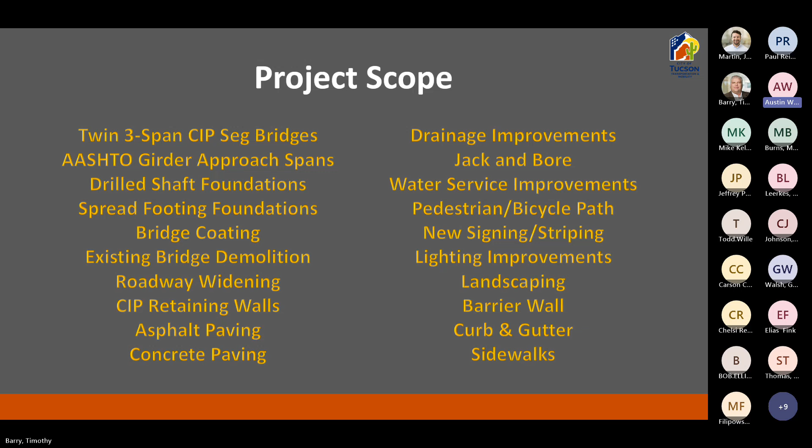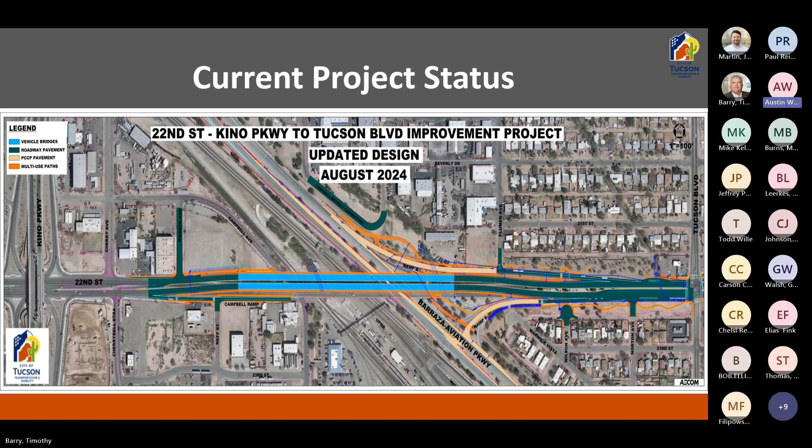So we want to talk about the current status of the project. I mentioned this rendering is also sitting over there for you to look at. That's the overall project with the updated design—the most current, up-to-date design of the project as it stands right now.

So the biggest change, and where we're at now, is project delivery. This is now going to be a pure design bid build project. The CMAR is no longer going to be this project delivery method.

We are at 100% plans right now. They are not the final signed and sealed version, so we cannot share the plans with you as of yet. So we're not going to have the final plans available for the group today. Once they are the final PS&E package, they'll be available, but we're just not there yet.

The project funding is finalized. That was a big hurdle with this project. We'll talk more about that in depth later on. We've also very recently received the categorical exclusion for the project, another big hurdle we've recently obtained. We are currently preparing the bid documents, as I mentioned in the schedule earlier, and we have an anticipated construction duration of between 30 and 36 months. We'll get a little more detail on that, but that's the current anticipated project schedule.

So again, what has changed? Quite a bit has changed with the scope of this project since 2021 when it was advertised as a CMAR project. Number one, we have obtained federal funding. There was no federal funding early on, but there is now. The project has received a RAISE grant, and there's also some STBG funds that have been obtained. So that means there will be FHWA federal highway oversight, Davis-Bacon wage rates, Build America Buy America requirements, EEO and DBE requirements. That's a pretty significant change from the original scope.

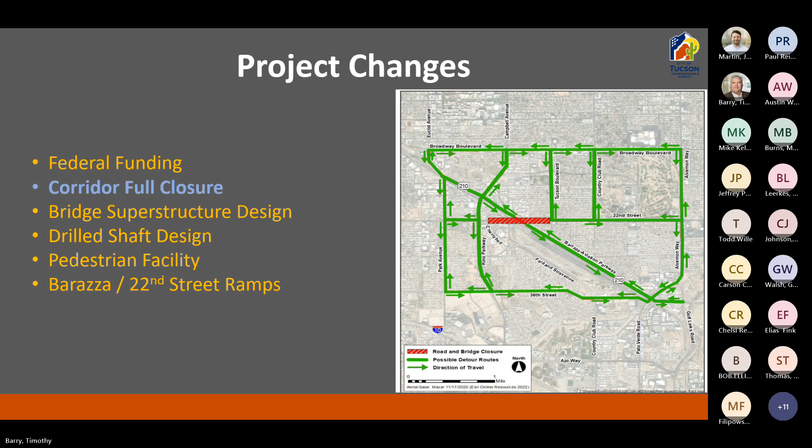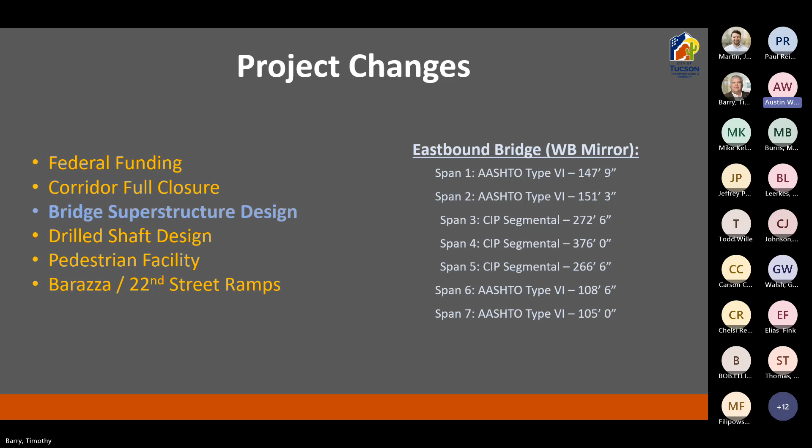Another significant change from 2021 is the superstructure design layout. Originally it was a 5-span cast-in-place segmental design. We now have 3 spans of cast-in-place segmental, per bridge, since they are twin bridges. So we have the span layouts, which I'll walk through briefly.

So this is one of the bridges. Just walking through the span layouts. This project has 2 approach spans of AASHTO on either side of the structure.

On the eastbound, you're going to have 147 feet 9 inches, and then it lines up to the abutments. It'll be shorter on the westbound, at 105 feet. Then the second span is going to be 151 feet 3 inches on the eastbound, and 108 feet on the westbound.

Moving on, span 3 of the segmental will be 272 feet 6 inches. The primary and main span over the railroad tracks, the majority of it, is actually 376 feet, span 4. Moving to span 5, which goes over Barraza Aviation, SR 210, it's going to be 266 feet 6 inches.

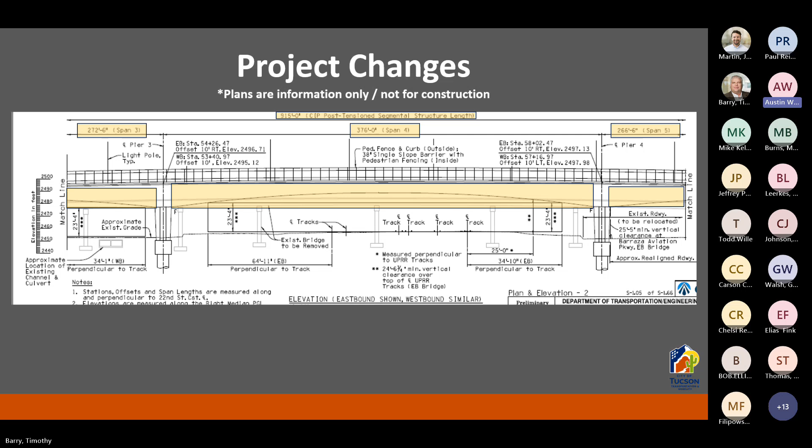Then we get to the final 2 spans of the eastbound and westbound, spans 6 and 7. You'll notice the span lengths flip-flop for the east and westbound bridges to align at the abutments. So the eastbound span 6 is 108 feet 6 inches, and eastbound span 7 is 108... then 105 feet for span 7. For the westbound bridge, span 6 will be 151 feet 3 inches, and westbound span 7 will be 147 feet 9 inches.

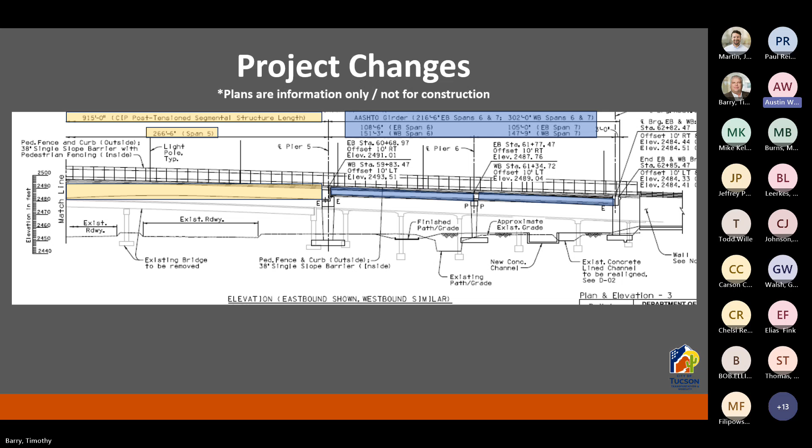Another pretty significant change from 2021 is the drill shaft design. I'll reiterate that what's shown here is not the final design. These are just approximate anticipated lengths, not the final lengths for the project.

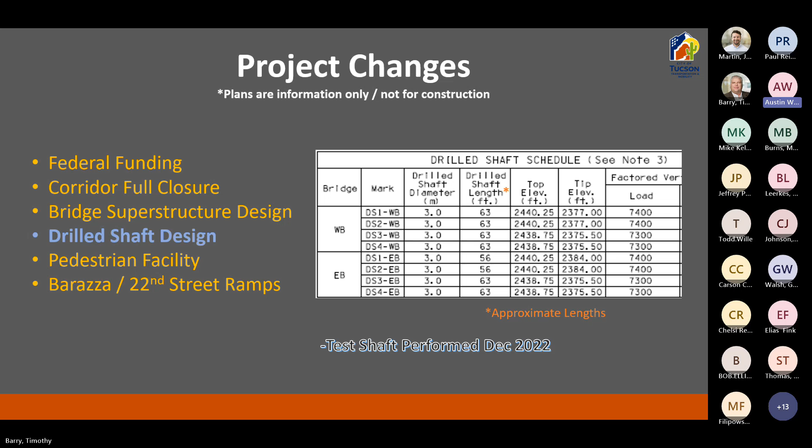There will be 8 drill shafts total on the project. You can see the approximate lengths, but we significantly reduced the overall number of shafts for the project, and also reduced their lengths. The final details will be in the final plans. We also want to note that a test shaft was performed in December of 2022, which has helped dial in these shaft lengths and the drill shaft design as well.

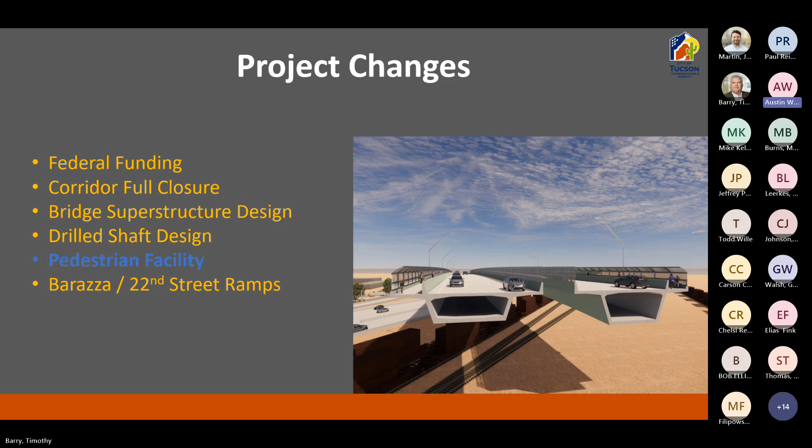Very significant change - if anybody looked at the plans from the original design back in 2021, the pedestrian facility has changed pretty dramatically. In the first design, there was a separate pedestrian bridge that hung in between the twin segmental structures. That has been gotten rid of, and now the pedestrian facilities will be on the outsides of the bridges, with 8-foot pedestrian, bicycle pathways on each structure. So that center pedestrian bridge is now gone. Now you can see a cross section from the plans where the new pedestrian facilities are located for the project.

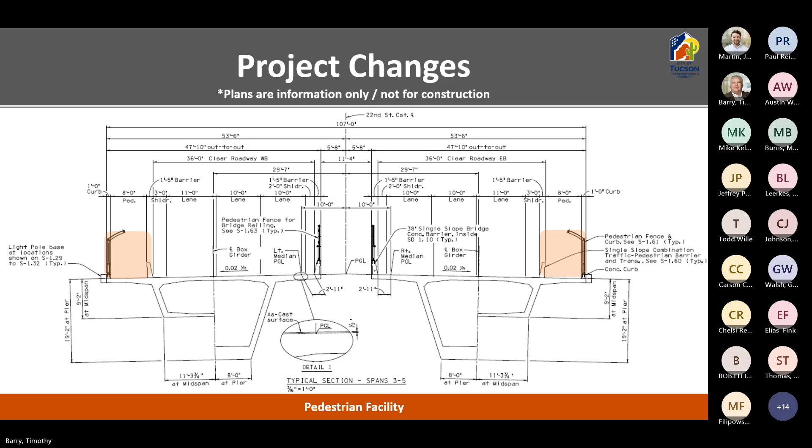Finally, some minor change with the ramp access between Barraza Aviation and 22nd Street. The most significant change is ramp B. The current configuration has 2 separate accesses: a dedicated free-flowing right to get on that ramp, and the current left turn ramp off of Barraza Aviation. Those will both be eliminated and combined into one single ramp. So from Barraza onto eastbound 22nd, there'll be one single ramp we're calling ramp B, and ramp A essentially remains the same. With this addition of ramp B, another change is Wilson Ave will become a cul-de-sac, so Wilson Ave will no longer access 22nd Street directly. So minor change there with ramp B as part of the new scope.

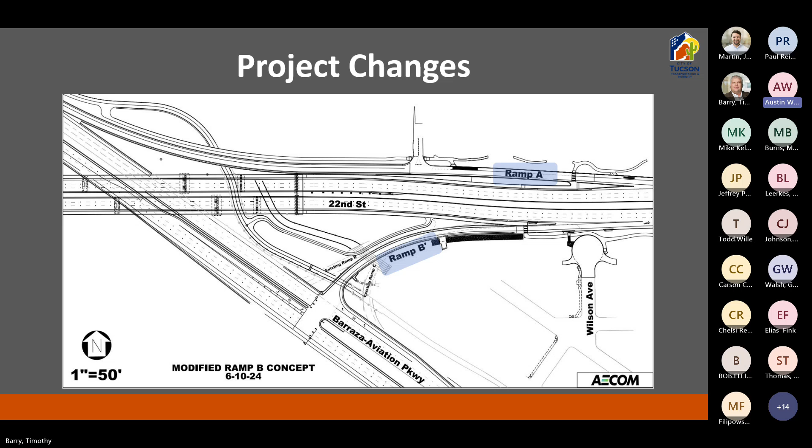Here's a rendering of that. We'll see more in-depth renderings here in a little bit.

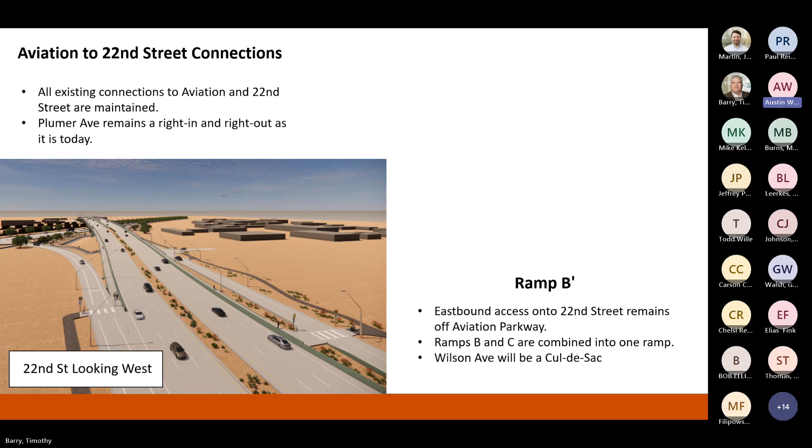So some general information for the bidders. In the contract documents, there's going to be some requirements for the segmental construction, including requirements on personnel for the construction manager, project manager, structures superintendent, and the structures second supervisor to have some level of experience with segmental bridge construction. Again, I point out these are draft specifications, not the final project specs, but those will be in the contract documents.

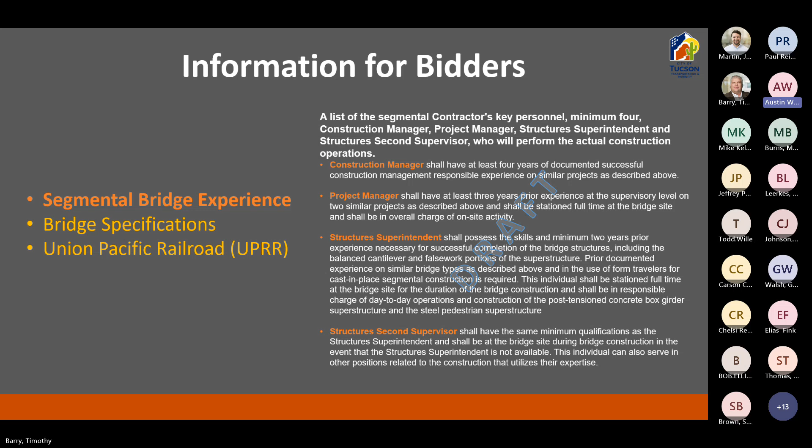As far as the specifications for the project, for the post-tensioning and grouting, we will be using the PTI specifications - PTI M50 and PTI M55 - for post-tensioning and grouting. The standard specifications will be the Pima Association of Governments, or PAG specs from 2021. We also will be utilizing AASHTO LRFD bridge construction specifications. And there is a portion of work on Barraza Aviation, so for any work related to Barraza Aviation, we will be using ADOT specifications.

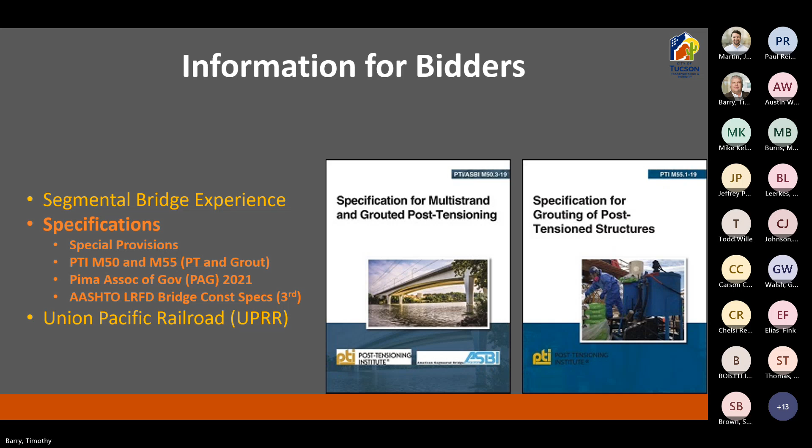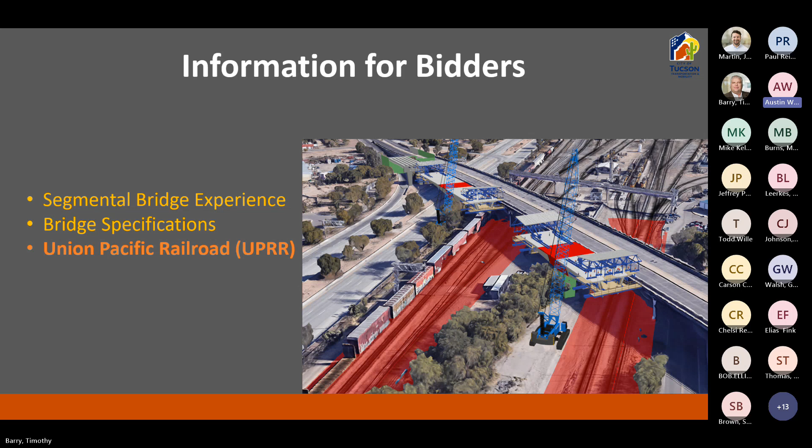Another major aspect of this project is obviously we are going over top of the UPRR rail yard. Besides the inherent obvious things associated with that, we wanted to point out a couple of things. One is through negotiations with UPRR over the last years, one thing we are going to include as a requirement is a track protection system for work occurring over top of the existing rail lines. There are 7 different rail lines that will be running underneath this new structure.

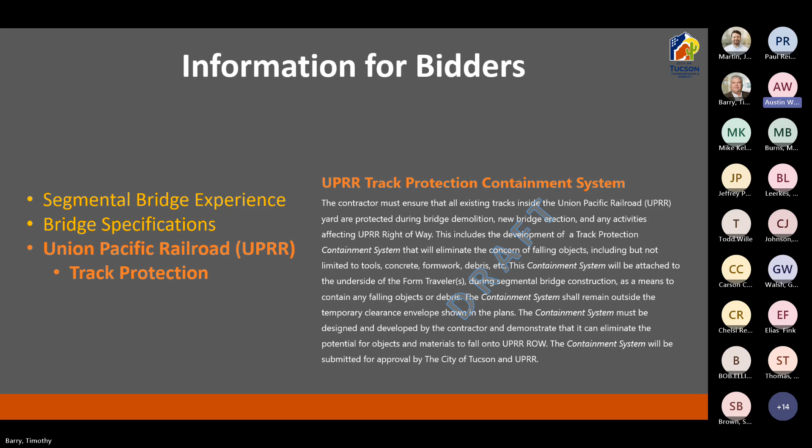So at any time when we are running underneath or over top of the tracks, we will be utilizing this track protection containment system. Essentially what we're anticipating, or what we'd like to see, is something hanging from the bottom of the form traveler system. We have some renderings of some ideas - again, these are just proposed renderings that might be utilized. Something that hangs from the form traveler and is able to contain small tools, small bits of concrete. Obviously nothing that could contain a segment or anything like that, but basically something for protecting the tracks as we progress along during the segmental casting operations.

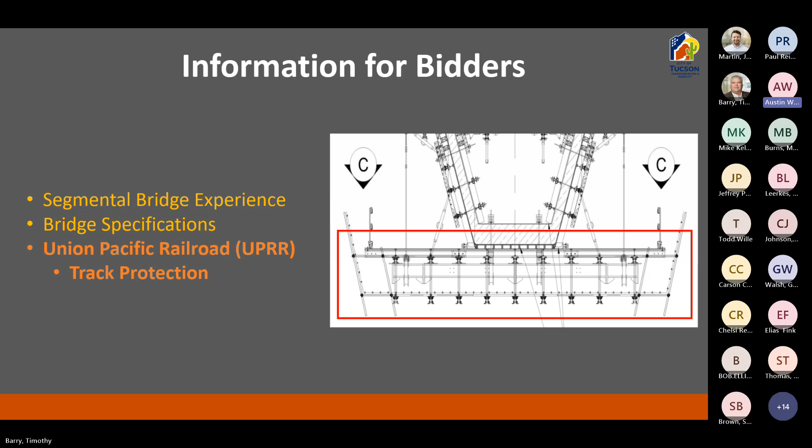Here's again a simple rendering of something it might look like. It'll be up to the contractor to develop this system, and it'll also be subject to approval by UPRR - of course, anything proposed out there, they're going to want approval of. So this will be something included in the project specifications, with a specification written for this, and it'll also be noted in the plans referring to this.

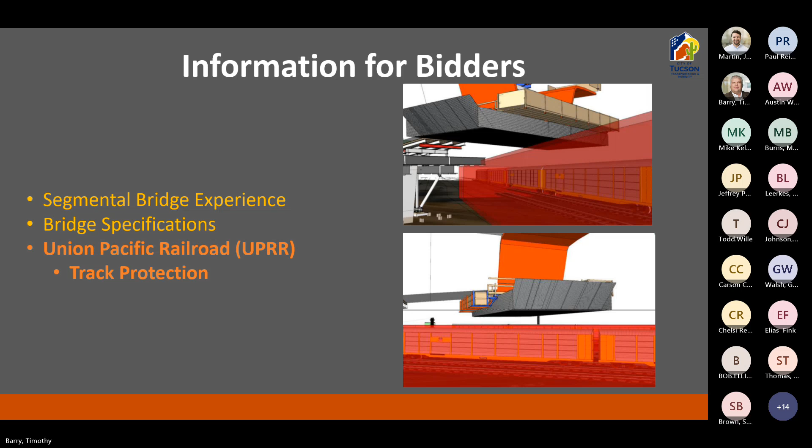Also related to UP, there's obviously going to be a number of submittals, but three right off the bat that are going to be important to getting construction started, that'll also require UP approval. First and foremost, the bridge demolition plan. There's going to be a lot of effect on them with that demo plan, so they will need to approve it. Then there's going to be a rail monitoring plan as well that they're going to have to approve, and a shoring plan.

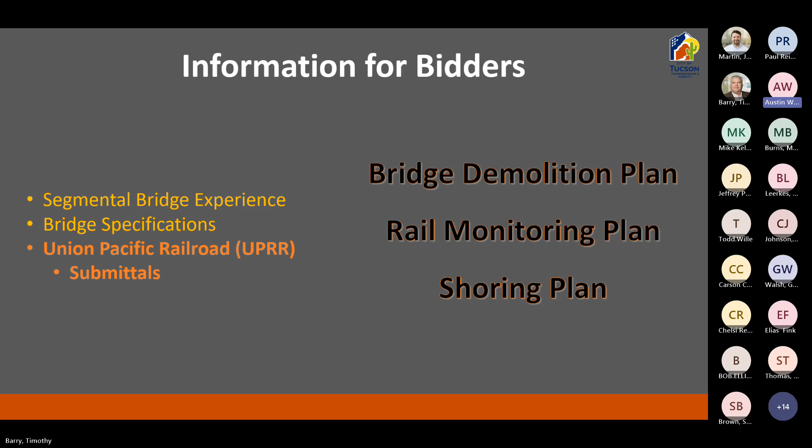So there are two piers that are in the right of way, and there's some other work that needs to be done in the right of way. So any type of temporary shoring for the existing UP facilities, there will be a shoring plan that is required, and of course, subject to approval by UP.

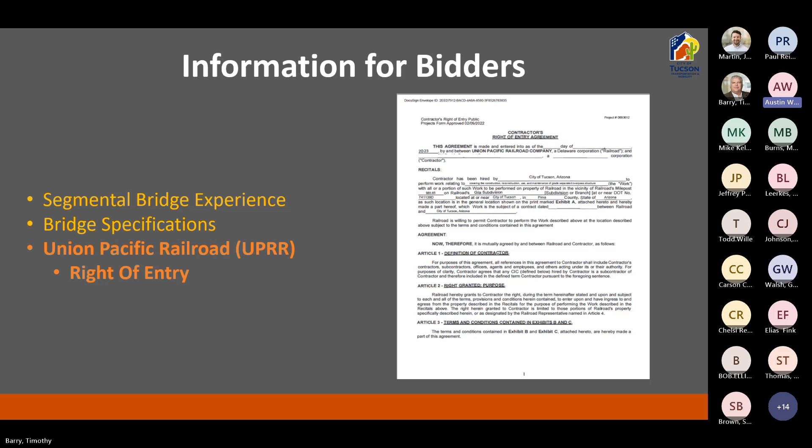I'm sure most people understand this, but the contractor will have to obtain a right of entry agreement through UP as well. That will also need to be done very, very quickly right off the bat. Anybody who's worked in rail understands what this process entails, but we're going to highlight some of the things related to this, as far as where the anticipated access to the rail yard are going to be. So Jacob's going to come up and talk a little bit more in depth about that, and also some of the property along the corridor for potential laydown and use by a contractor.

One thing to add: not only is a lot of the plans subject to approval by UPRR, but any work in the Barraza-Aviation Corridor, SR 210, is also subject to review by ADOT. So just be aware of that as well.

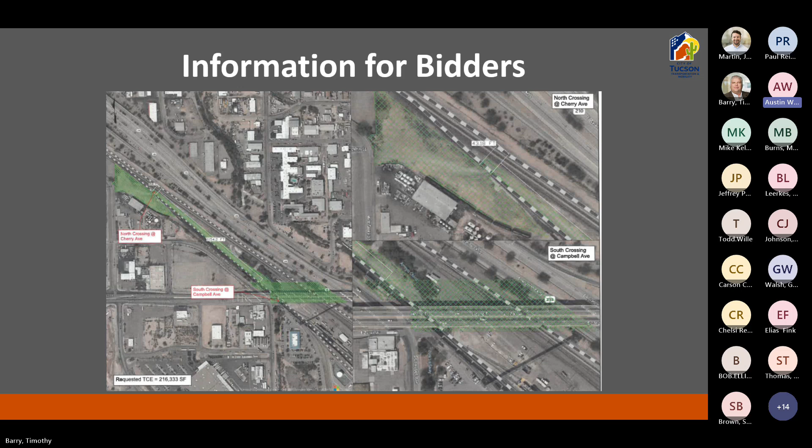So I'm going to move on to a couple areas on the project that can maybe be utilized potentially by the contractor going into it, pulling up some different locations on the project. I'll start with a couple of areas that they may be able to utilize as laydown yards or areas to stage their work.

I'm going to start on the west side of the project, at the corner of Cherry Bell and 22nd. There's a small section of property right here that is privately owned. Again, this is a potential area - something that has to be worked out between that private landowner and the contractor, but there is a space there that could potentially be used by the contractor for construction.

There are also a couple other properties. There's a small section right here on the northwest portion. Not only is there a lot of work going on in this area along the corridor and the easement, but there's also a small section in this area that can be utilized along Campbell as a potential laydown area as well for the contractor.

Now, this is still working with the city to make sure what property and areas are available. Definitely want to make sure that you follow up on that. There is an area that's adjacent that's being developed as part of a separate development plan, so just make sure you know what area is able to be utilized.

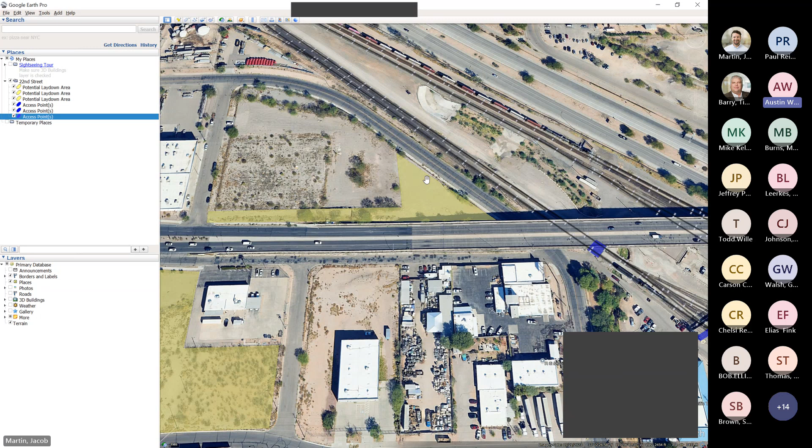We actually have a small section where the test shaft was done in this area right here. So there is a small section where we did do the test shaft for the project.

Moving over to the east side of the project, there's some property on the northeast portion, and this is city-owned property. Again, there are discussions on what can be utilized - those will have to be discussions with the city of Tucson to ensure that this property is able to be utilized. But there is opportunity to utilize some of the property from the city of Tucson as staging areas.

We're going to talk a little bit about access. Again, when the right of entry goes in, all the different areas that the work can be performed need to be cleared with UPRR, and even the access points.

So I'm going to start a little bit outside of the view up here on the northwest side. There is a small access point off of Cherry Bell in this section that can be utilized, and actually UPRR has gone in and reinforced this crossing area to be utilized in the future by the contractor. Again, this is all part of the right of entry that has to be completed, but there is a small portion up here on this section that can be utilized to access between the tracks for construction activities.

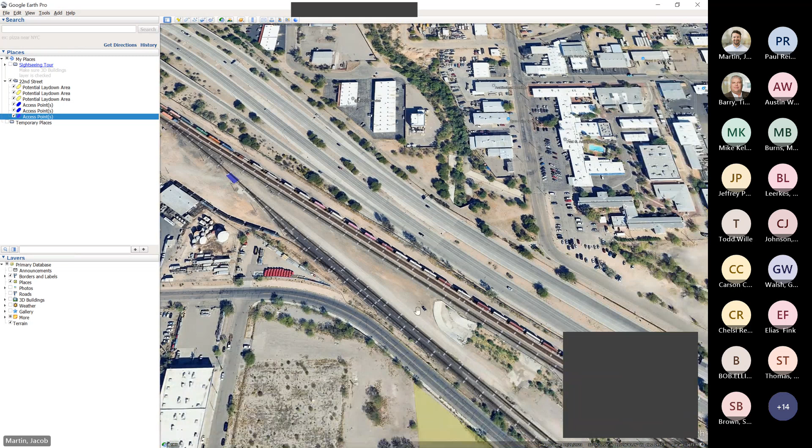Moving back down to the project, there is another small crossing right underneath the existing bridge. Just a couple of notes: there is quite a bit of traffic here for the making up of the rail yard itself, so there's a bit more traffic compared to the other side. But this is potentially an area that can be utilized as well.

There is a box culvert along this section of the project as well that comes underneath that they currently utilize. So that would also, depending on your stage of construction, be something the contractors can utilize as well.

Also on this project, there is a pedestrian bridge. You can see the shadow in this overhead view. There's a pedestrian bridge that potentially can be used by the contractor to access in between the tracks to perform the work that needs to be happening. Again, this is all potential areas that we've identified with UPRR, but it would have to be worked out with the contractor and UPRR to make sure that it meets their expectations. So these are just a few areas to access their right of way.

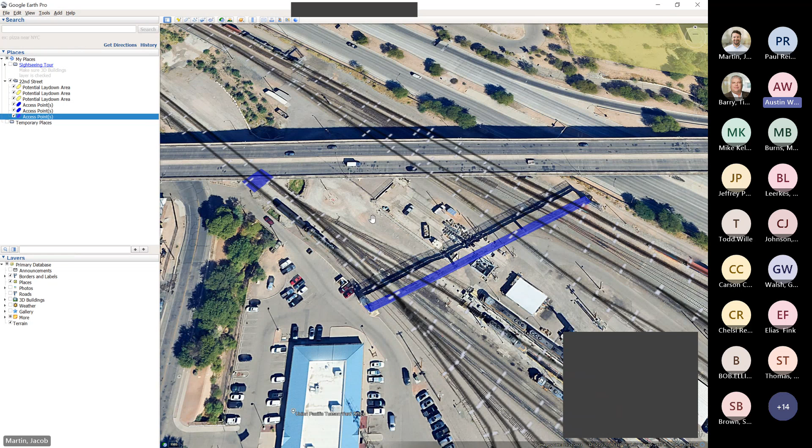Okay, thank you. And we encourage everybody to go out there and take a look. Obviously, access to UP's right of way is not going to be available, but from public right of way and from the surface streets, you can get a good look at the project, at the existing bridge, and at all these different areas. So we encourage everybody to go out and take a look at the area.

So now I think we're going to do our sort of virtual tour. So Paul, if you want to go ahead and take control, and we'll get that set up.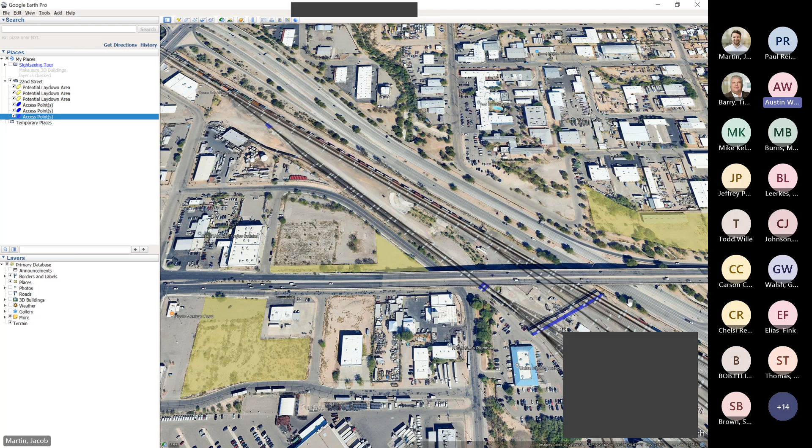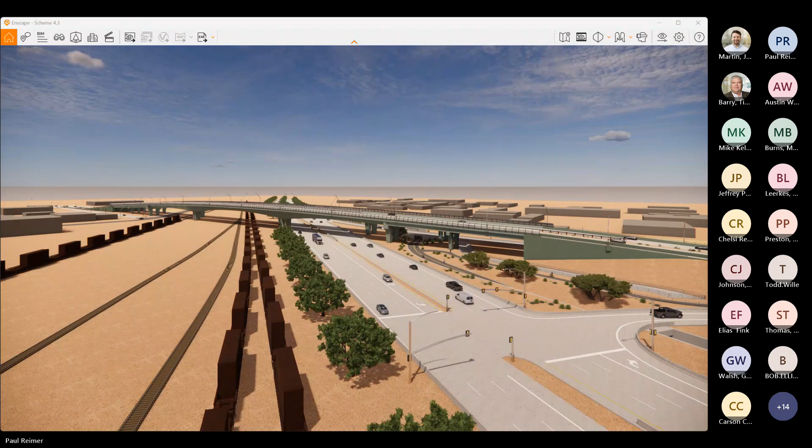A lot of these things we're talking about, the access points, are things we've talked with UP already in the past. But as Jacob mentioned, will they change their mind? Will there be different requirements? We don't know. But in the past, they've been receptive to a lot of these different areas. So that's what we encourage you to explore for whoever puts the contractor on board.

All right, now as we take a look at the 3D rendering here, we'll go ahead and start on the east side and fly over towards the west. Paul navigates. We're going to do a quick run through of a lot of this information, and then we can fly around, and if there's any questions, we can show those views. So just a heads up, we're going to do this overarching view, then get a chance to see some still shots, and if there's specific questions on areas, we can always travel to that during the question and answer period as well.

So as we are starting on the east side, heading westbound, what you see on the far left is ramp B coming at us. That's ramp access from Barraza Aviation onto 22nd Street. On the far right, that is the access to ramp A. You can see off in the distance, that's accessing Barraza Aviation from westbound 22nd Street.

Then we approach the bridge. As you can see, part of the scope of this project is the widening of 22nd Street, so you see 3 travel lanes in each direction. That's part of the main scope of this project. You can see the pedestrian access; we'll get a better shot of that later on, and we have some still photos as well from this 3D model that we're going to show. But as you can see, in the middle, that pedestrian bridge, the steel pedestrian bridge, is no longer there. The pedestrian access is on the outsides. New lighting is also part of the scope of the project, new lighting on the bridge structure itself, as we are now passing over Barraza Aviation and approaching the rail yard.

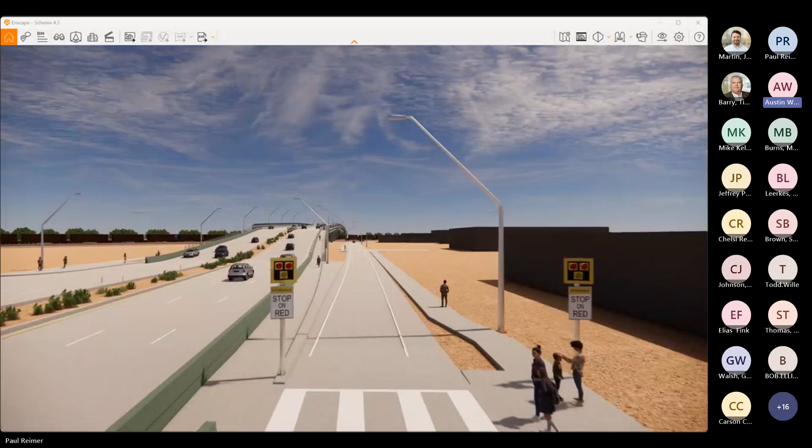So now we're going to fly off in the other direction. We'll stay down below grade here. All these roads are obviously included in the new scope. On the left, you can see the cast-in-place retaining walls on the approach structures.

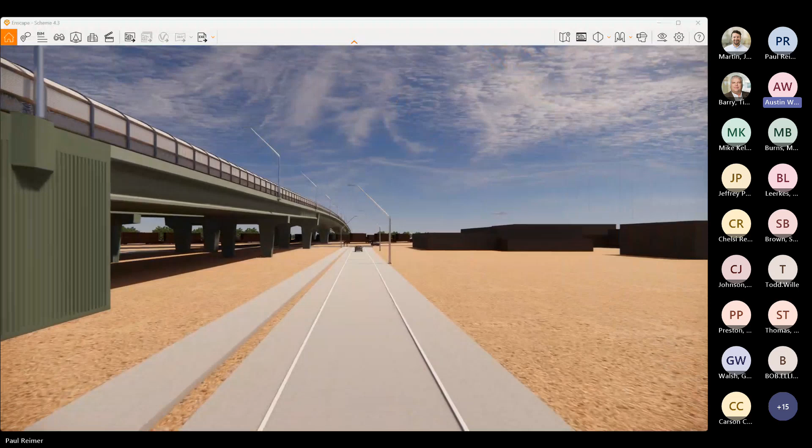And we're approaching now - you see the AASHTO girder spans, span one for the bridges there, and the second span of the AASHTO girder section. Also, I'll note new lighting down below as well as on the structure above.

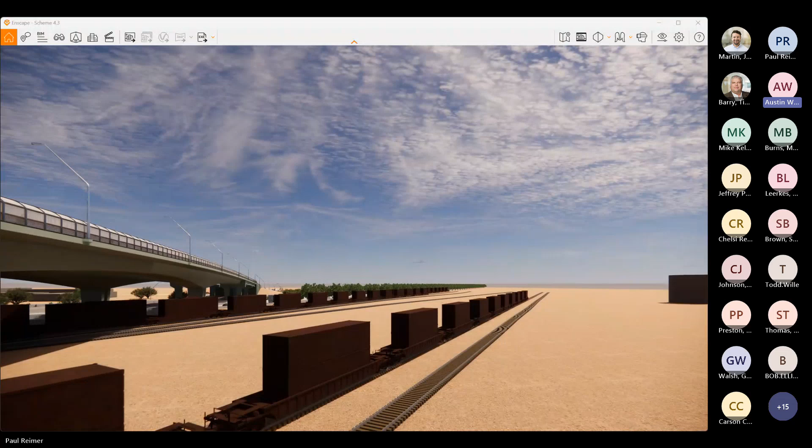So now we're going to the segmental spans, the first segmental spans, and approaching the UP yard. Right now this is as close access as you're going to get to the UP yard. I'll point out also, if you pan a little bit to the left, Paul, you can see the pier locations that are actually in UP right of way.

Right there, twin wall piers for the segmental portion. And obviously those two pier locations are where the drilled shaft foundations are. Then you'll see the second ones as we progress further towards the east.

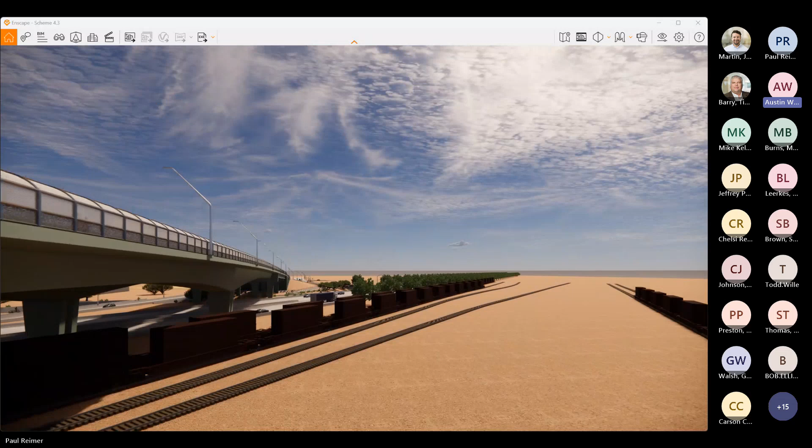There are 7 different crossings where the bridge crosses over active rail line, I think I mentioned before. That is where there will be the most influence from UP, when we're actively working over top of the rail lines. There's the second set of piers, and then as we're approaching Barraza Aviation.

Again, the twin wall piers. Note that these twin wall piers on the left are actually in ADOT right of way. So this section is not going to be in the railroad right of way. These were actually moved so that we were outside of the right of way of the rail yard.

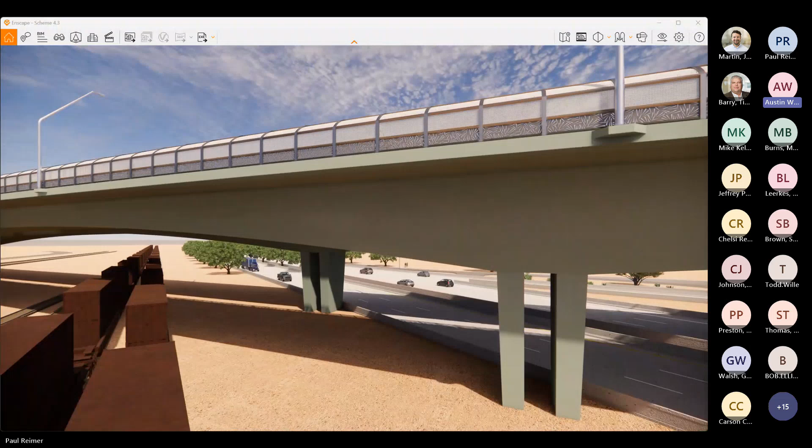Thank you, Jacob. Yeah, so they're not in the rail right of way. Obviously they're still being impacted by the rail as far as staging, crane setup, materials, etc. But they are technically not in the rail right of way, though they are in ADOT right of way.

As we continue towards the east, see the other side, the AASHTO girder spans, also some more cast-in-place walls off in the distance. Then what we're going to fly over is the Barraza, or the aviation pedestrian path running left to right there - that's an existing pathway that we're going to be tying into.

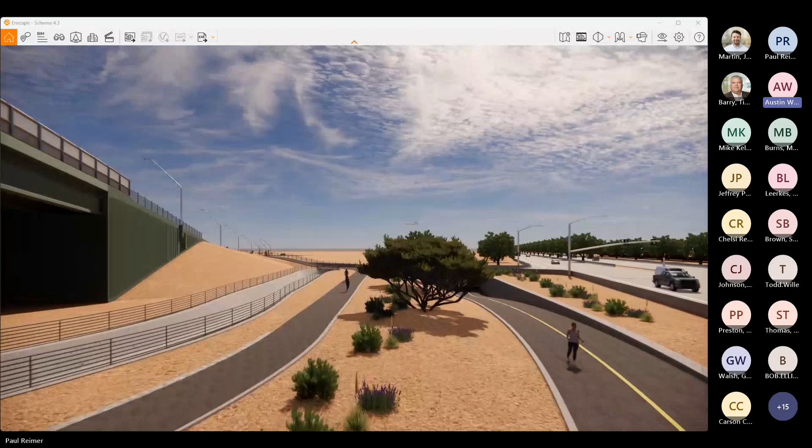So as we fly up, that connection that curves around that we're going to fly over - that's the connection that is going to go directly to the new bridge and the new pedestrian access on the corridor. This is something additive to the project. So coming off the eastbound side, there'll be a direct connection that gets you all the way down to the aviation pathway.

And now we're also flying right on ramp B, where ramp B ties into 22nd Street. You're going to see there's another HAWK crossing. So for pedestrians that don't want to go down to the aviation pathway, that want to continue further east on 22nd, there's another HAWK crossing to connect to further pedestrian facilities further down. So that's the fly-through.

Now we're going to just touch on a couple of stills. I'll go ahead and change this out.

They're - what was the term you used? I'm sorry, Claudia - they're on the opposite sides of the bridge. And they are AASHTO Type 6 modified girders. So for those shorter spans, you're going to have 4 lines versus the 6 straight lines of the girder. That's the distinction between those two. Go ahead, Paul.

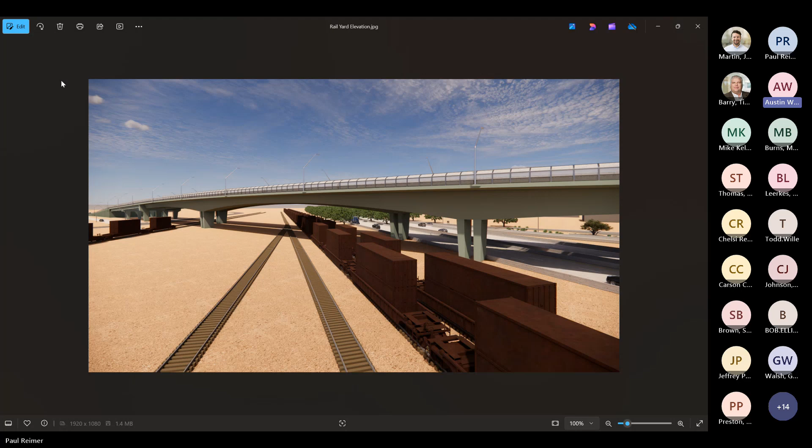So those piers were adjusted, replacements, so we can avoid having to move that oil water separator. It's not shown here, but that empty space in the shadows between the empty line and the twin walls on the left, that section is where the oil water separators are, and that does not have to be removed or relocated as part of the scope anymore. That was a pretty significant scope item in the earlier version that we got eliminated. Thank you for pointing that out, Jacob.